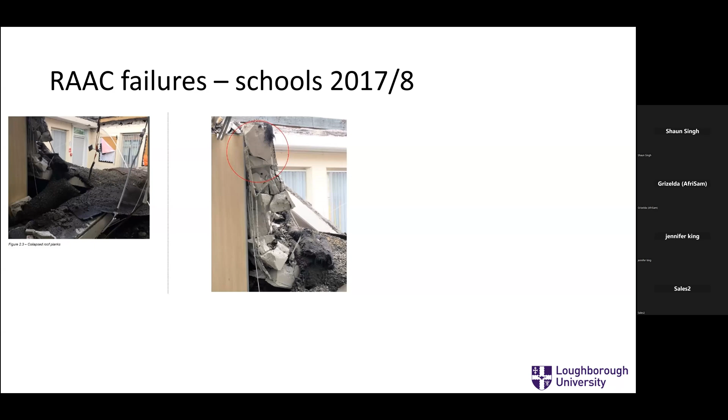So a quick timeline regarding why we're worried about it and why it's in the news. This is a school from 2017-18, so actually 5-6 years ago. The whole roof collapsed - thankfully at the weekend it was empty, no one was even there, no one hurt. There was a slight study, but in hindsight, not a good enough study. Potentially shear cracks, you'll see the red circle there, potentially a shear crack at the support, but a thorough study wasn't really done.

A year later, one plank fell down in the classroom. Again, empty, no one was hurt. One end came off the support, and this is the main failure mode we're worried about. To date, now we've gone looking, there's around 7 to 10 instances like this where usually one plank has fallen off somewhere in a variety of types of building. No one's been hurt yet at all, pretty much in empty buildings, and most of it's been caught by some other part of the element.

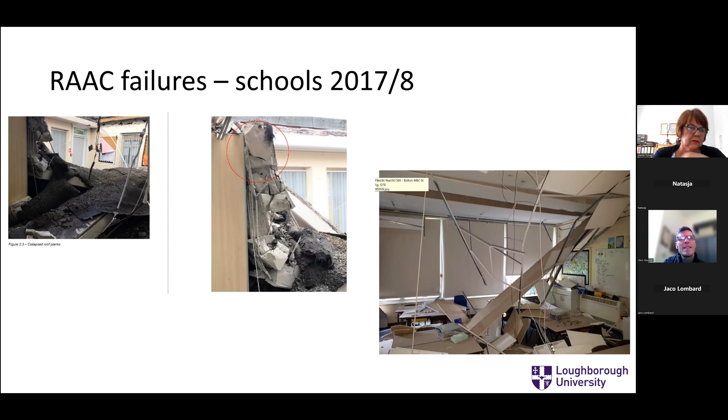We know now that these elements can fail and can fail without warning, although a very, very small proportion of them. But this is the concern, that they can fail with no warning, potentially fatally.

So moving on to hospitals, we've been studying hospitals. These are photos from a real hospital this year. It was on LinkedIn, which is where I got the photos from. A surveyor went in, concerned. You'll see their plank - it's not a collapse, but it's failed. Failed by serviceability deflection, but probably by overloading. It's quite a typical failure mechanism.

It's probably been overloaded from the roof. Someone's probably put something on the roof that shouldn't be there, overloaded it a lot. It's deflected, it's cracked, it's spalling. And to be honest, it's almost been held together by the suspended ceiling and all the wiring and various other things hanging from it, which we do find is sometimes the case.

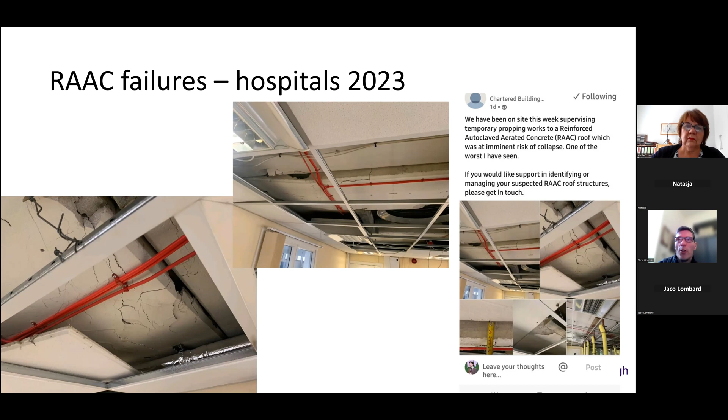So this is a failure, but it's bad practice. It was overloaded, and if it'd been made of timber, it probably would have failed. If it'd been made with another type of concrete, it would have probably failed. But it's RAAC, and it's in the news, so it's of interest. So that's a quick introduction why it's in the news.

I think I need to explain what RAAC is, because you probably, like me, have been brought up on concrete, traditional reinforced concrete, which is everywhere, as we know. That's what we teach at universities, that's what we build with, and that's what we understand. Concrete of about 30 megapascal, 40 megapascal. It's got a density of 2,400. It's got reinforcement in it. Every country in the world builds with it - second most used resource in the world after water is what I tell my students.

But RAAC is different - though the name's actually pretty good. So what is it? It's reinforced - you see some photos there. It's got steel reinforcement, 500 Newton tensile steel. It's welded into a cage. It's got longitudinal tensile bars. It's got anchorage transfer bars that I'll come back to at the end that give it anchorage at the end, but it's steel and it's reinforcement.

The unique bits are the autoclave - that's a picture of an autoclave. It's a big pressure cooker to you and me. You might have one of these, a little one in the kitchen. So it cooks the concrete at temperature, about 200 degrees and under pressure, basically increasing productivity. It makes it cure faster, gain strength faster, and hence you can produce more in your factory. Not rocket science, and it's been around 70, 80 years.

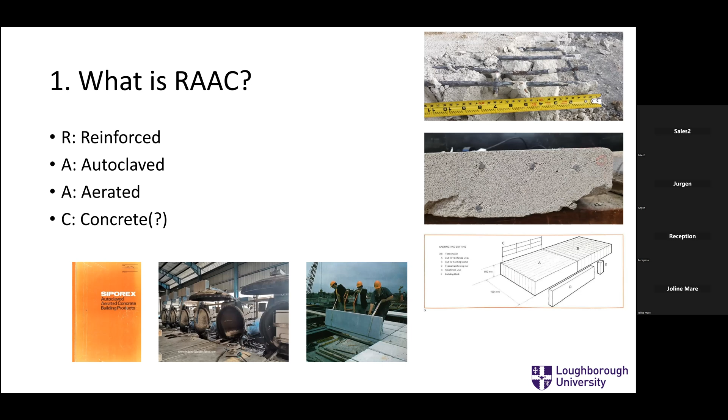The unique bit is how it's cooked or made in the mold, because of the aerated, very low density. So if you're a builder, fantastic - this is half the density of water, a quarter of the density of concrete. You can pick up big pieces on your own. To build with is great - it's fast to construct. You need smaller foundations, a lighter supporting structure, say a steel frame can be a bit smaller.

MMC - I don't know if you use the terminology where you are, modern methods of construction, something we're obsessed with here in construction and in government, trying to force the industry to be more modern, to use more precast, prefab, modern methods, offsite, modular, whatever the terminology.

We're trying to get the industry to be more productive and efficient. 100 years ago, this was the MMC of the day. Fantastic, and it's still used in many countries today. Because of the aerated nature, it's very thermally efficient, and economical because there's not much cement or material in there. It's light, easy to transport, low carbon footprint. There's a long list of advantages of why this is actually a very clever material when you do it right.

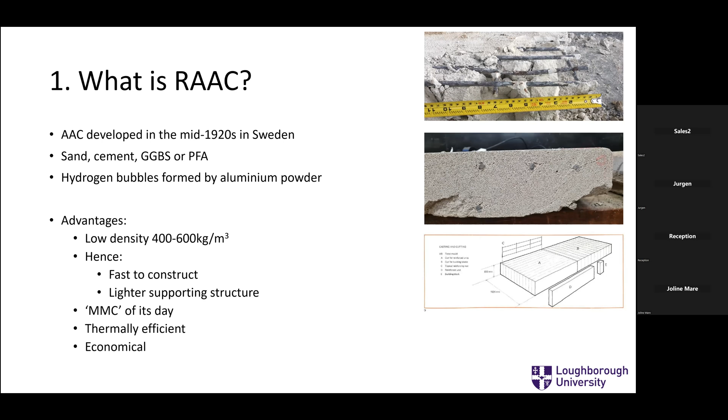This material has some similar problems because of its unique makeup. They manifest and play out in a slightly different way, which I'll come to. So I'm not here to bash RAAC. I've researched it and know it very well now. It's a different material and it's very clever, but it's also susceptible to abuse.

Because it's lightweight, you can cut it with a handsaw. And certainly if you have a circular saw, you can cut through the rebar, because the rebar is typically 6 millimeters, 8 millimeters, maybe 12 millimeters at most. Circular saws, which you get on every building site, will cut through it really quickly. So it does get abused a bit on site, which I'll come back to, and that's been one of the problems.

So I mentioned the reinforcement - it's welded, it's smooth, and it's got a coating on. Some of you might be thinking, 'oh, aerated, that's not going to keep the water out, that's not good for durability.' And you're totally right - the AAC bit is rubbish at durability. Water can go in, chlorides, carbonation - it carbonates really quickly. So for protecting the steel, it's terrible.

Well, we know this, and so we put a coating on the steel. When it's made, the steel is dropped into a liquid slurry coating. There's a variety of coatings - could be cementitious, a higher strength, more concentrated cementitious sand cement slurry. Some of them are polymer modified. Nowadays they're powder coating, so electrostatic coating applied to the reinforcement.

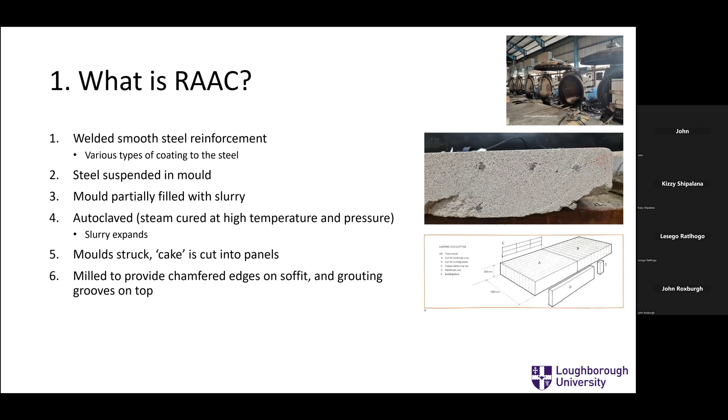They're put in the mold, you pour this slurry in, you put it in the oven, and you autoclave it at high temperature and pressure, and the slurry expands due to the aerated nature. We don't make them as individual elements - they typically come about 600 millimeters wide and about 200 millimeters thick as a typical cross section. So we don't make them in molds like that.

We make them in very big slabs, like the photo there, called a cake - they call it baking a cake, which is really efficient for productivity. And then they cut it up. They literally use a big cutter, often a wire cutter, like a cheese wire cutter but on a big scale, and they slice up the big section into smaller panels. Then they might mill the edges, cut it to shape slightly, put some chamfers on, and shape it slightly.

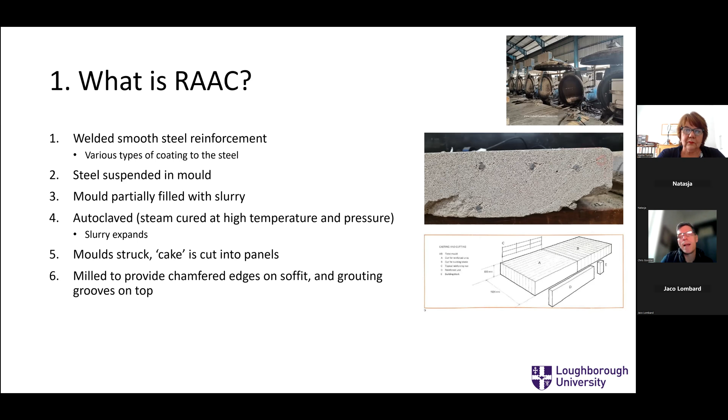So just to share some photos - this is a manual from 1977, so it's been around a lot. You'll see several planks there. As I mentioned, 600 mil is the typical width. They come in various lengths and depths - there's a certain length to depth ratio to get your bending moment and structural capacity, but 600 is often the typical width.

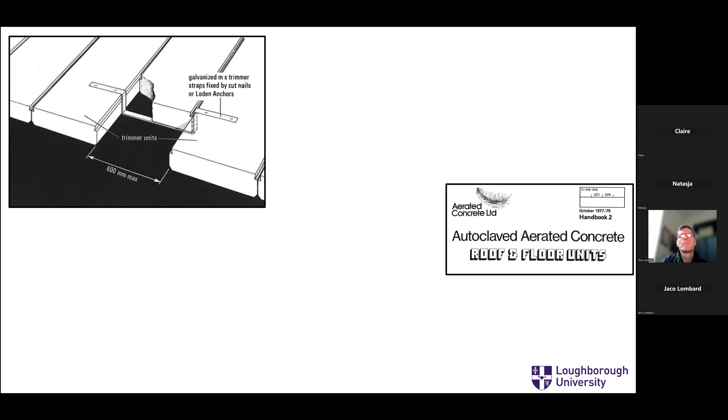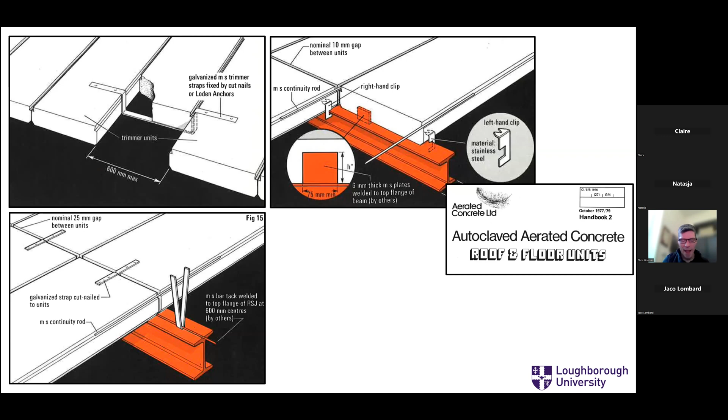So they can be on steel I-beams, or can be on bricks. If you're on a brick, here's my brick, and a brick's that width. Here's one I made earlier. So that's a brick, and we have a plank, and we'll have two of them sat like that. If you build it perfectly, you're sat on about 50 millimeters of bearing for these planks.

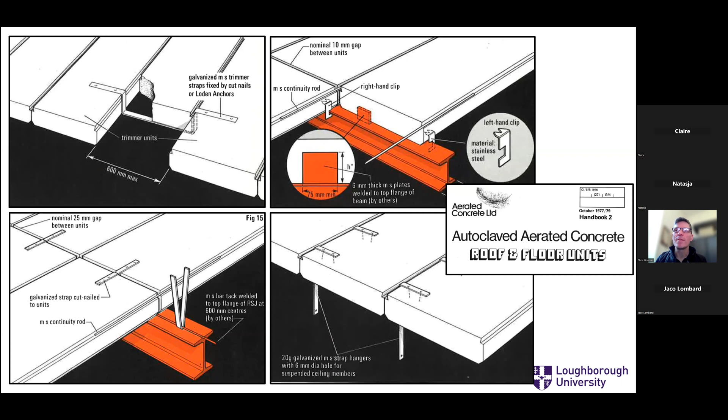I'll come back to whether we built everything perfectly in a minute. So that's how it's made, what it looks like, and how it's built a bit.

Some of them have 10,000 planks in the roof. Imagine the whole flat roof of a major hospital in a city is RAAC - 10,000 planks, and the walls too. So they have a lot of it, and a lot of it is not doing very well. Then you get an assortment of other types of buildings, shapes and sizes.

You'll see there, 7 days ago, it's in the news on a daily basis. Somewhere finds it somewhere, and they find some. I mentioned they're still manufactured in many countries, expanding greatly in many, like India and China, very popular. You'll see Xella is one of the leading companies.

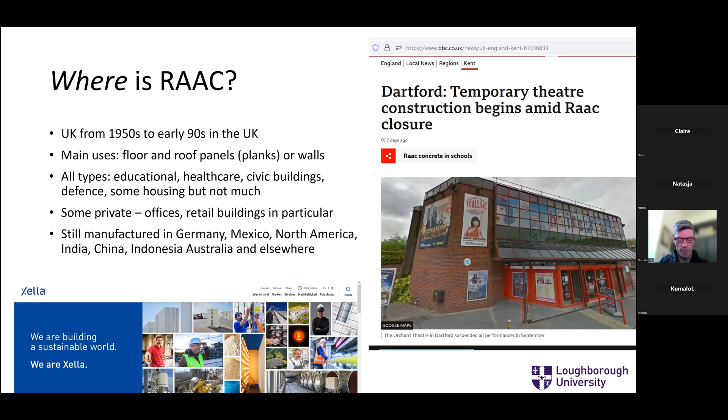There's nothing wrong with the approach, I want to mention that again. If you do it well, like any construction, it can be very good. If you don't do it well, there's problems, and that's what I'll be talking about now really. So, what's the problem? If it is a good system, what's the problem?

I mentioned it was very popular here. There were some studies in the 90s at BRE, which is where I used to work, but I didn't do this myself. They tested some panels and they were deflecting a lot. They creep more than normal concrete if you overload them, because of the compressive strength, so they were deflecting more than normal concrete in some instances. The advice was, there's nothing wrong with it really, but it does deflect more, so be very careful using it because it does have some problems. The industry moved away from it and stopped using it in the UK from the 90s.

I showed the photos of the school collapse - that raised it up. We have something called SCOSS here, the Standing Committee on Structural Safety. This is where you report building failures for the good of the industry. There's a report from 2019 saying you should go and find out where your RAAC is and check it's okay, because it fell down in a school. So go and find it and have a look.

The hospitals were already on this. The NHS, National Health Service, looks after all our health service and hospitals, and they have a lot of RAAC. Hospitals are 24/7 buildings, occupied 24 hours a day, 7 days a week, with important people - patients and staff - and therefore need to be open, maintained, and operational. Their estates and facility management teams know their buildings inside out, and their job is to keep it running. They know every brick, every plank, every piece of wood, and they survey, monitor, and maintain it. They do a great job.

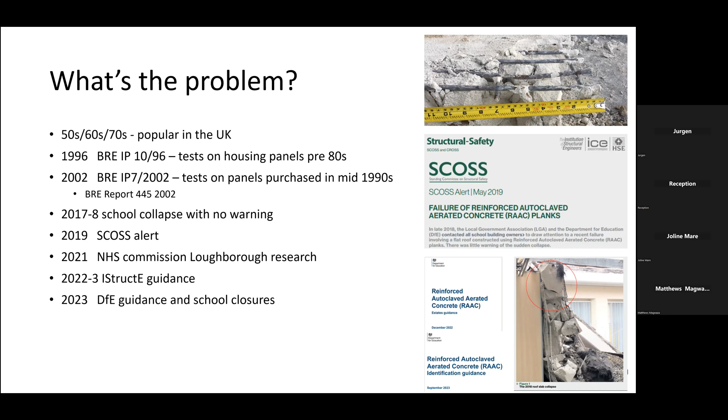There's some guidance from the Institution of Structural Engineers, which we contributed to, and I'll mention that in a minute. Then this year the DFE, our Department for Education, produced some guidance on school closures, with immense interest from the whole industry and from government. But really, it was probably the SCOSS alert that raised it in people's consciousness as something that needs special treatment.

So moving on to the research we're doing or have done on RAAC. There are some collaborators on the side there, funded by the NHS - credit to them for putting their hand in the pocket, which in hindsight proved to be a fantastic thing to do. They saved the country millions. We had partners like SWECO, CPT - corrosion preservation technologies, leaders in corrosion of structures - and some testing partners there, Lucidium.

So we did a variety of things: ground penetrating radar surveying where the rebar is, corrosion monitoring, testing. We did SEM analysis, XRD, material characterization, structural testing of old planks, some modeling, finite element modeling, monitoring, data risk analysis, and some artificial intelligence on the surveying and data analysis. But really, the ultimate aim was to understand how RAAC is different and how it behaves differently.

Because we can see it behaving differently - we can see it creeping, deflecting, we've seen it fail, but we don't know why. So, in partnership with the National Health Service, the aim is to better understand how we can look after the RAAC we've got.

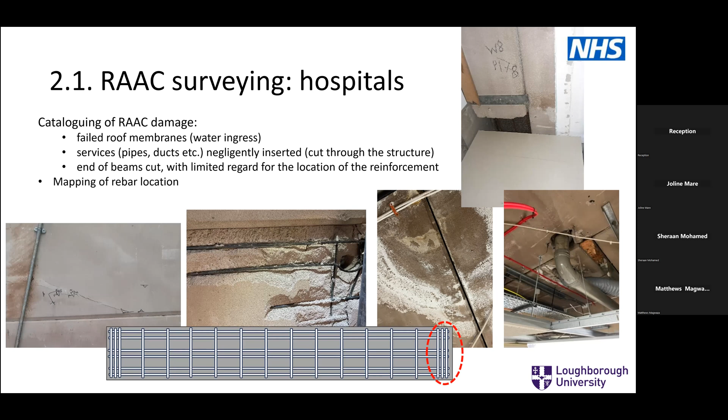Then we did some structural testing, partly in the lab. We took about 20 planks out of hospitals and tested them full size in the lab: compressive shear testing, pull-out testing, bending.

We also did some testing on site. So you'll see a live test on site there. That is bags of sand, 25 kilograms each, stacked up on one plank until it failed.

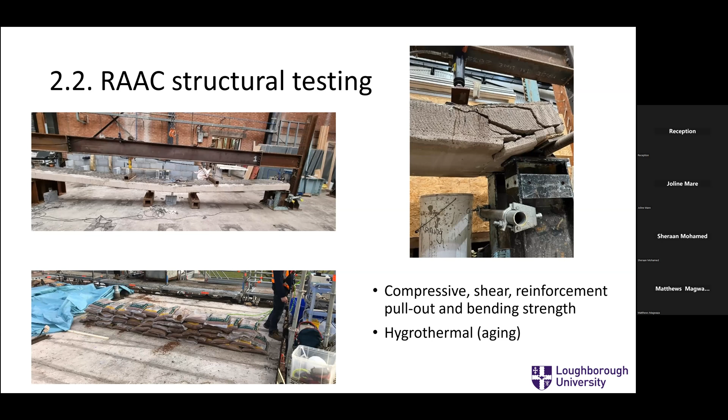Do you see the video there? That's me in my boots. That's one plank, 600 mil wide. Take off the waterproofing, and if you jump up and down on it, it flexes quite a lot. This material does creep, it flexes. It's fairly similar to timber as a material in many ways, rather than concrete.

We had quite low hopes of it taking much load, partly because of the collapses we'd seen. But when we loaded it, you'll see 92 bags of sand - the engineers among you will know that's a very decent UDL load, a very decent load per meter squared, 2 or 3 times the design load. So it took 2 or 3 times the load it was designed to. If you do it properly, this material is strong and takes a great load.

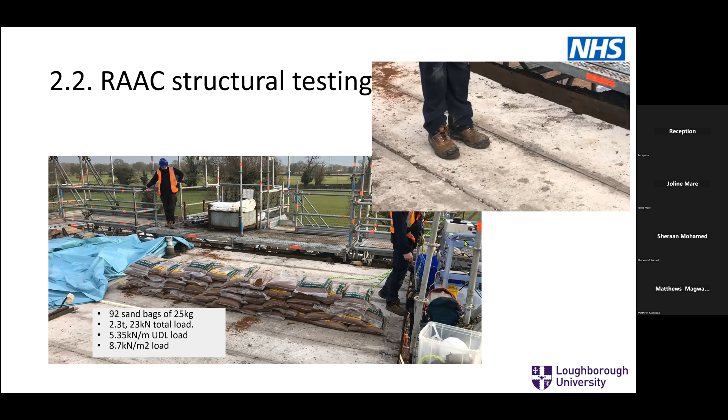So this was interesting - what's going wrong? Why have some collapsed, because the ones we're testing are actually doing very, very well?

The compressive strength I mentioned was very low, but we know that, and it was designed to be low, so that's okay - it actually has little influence on the structural capacity. If you change the compressive strength from 2 to 4 megapascal, the structural capacity, as in bending moments, doesn't change a great deal. It's the steel reinforcement that is the capacity and does the heavy loading.

One of our conclusions: we tested 40-year-old planks. We took them out of buildings, transported them on the motorway, craned them into the lab. They cracked a lot, they do crack quite easily. And we tested them, and even then they took a good bending moment above what they're meant to from the design codes. So again, the planks themselves aren't too bad.

Even after aggressive hygrothermal testing - we put them in chambers, applied several days of rainfall, intense rainfall, accelerated weathering, temperature cycles of plus 40, minus 40 - their performance reduced slightly, as any material would in that aggressive environment. But still, bar one plank, they in general took enough load, even after that very aggressive hygrothermal testing. I think we were probably surprised at this.

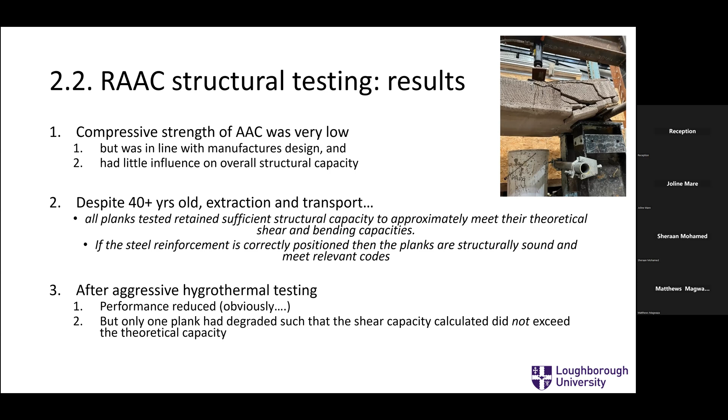But what they've done is sawn through the steel - sawn through the end of the longitudinal steel. So you've got no cover. In worst cases, water can get to it and it can corrode.

But the big problem, and this is where the main risk is, in some instances they've not just reduced the length of the longitudinal steel - the anchorage transverse steel at the end that anchors those bars and stops them slipping all the way through, they've sawn off. So imagine the anchorage of those longitudinal bars, which take the bending moment - because the AAC is so weak, there's very little anchorage, very little at all. They need these welded transverse bars at the end to anchor them, otherwise they slip through. And if you saw them off, those bars can slip through when you increase the load. So this is the key concern.

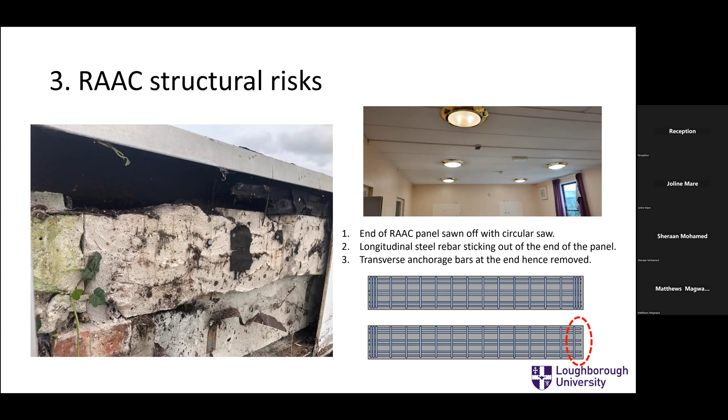This is where builders have cut the reinforcement off, which in any type of concrete is obviously a bad thing to do, but in particular for RAAC is very bad. So there's a photo of the inside of a RAAC panel. You've got the longitudinal reinforcement and transverse reinforcement, and it's the last bar that's important.

You need that anchorage bar at the end to anchor at the end, and it's this zone near the support that we're worried about. So the guidance says that last transverse bar, anchorage bar, needs to be over the bearing. Because if it's not, then you've got no reinforcement at the edge of that bearing, and a shear crack can develop from the edge of that bearing into the plank.

And that's a shear crack with no warning. There's no deflection warning, there's no initial cracking. It just cracks a shear crack, and it can collapse. And that's what's looked like has happened in some of the failures. So the really tricky thing is that you can have a room like this that looks perfect on the inside, but really there's critical reinforcement missing on the inside that you can't see. So this is the worry.

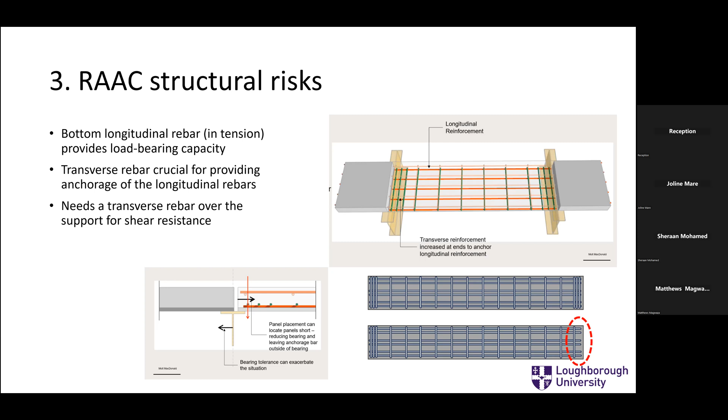That's the main worry. There's also a list of other defects in the guidance that can exacerbate this or accelerate it. So the main issue is the steel missing, which can lead to a shear failure with no warning. Some of these other defects can lead to that.

Voidage around the reinforcement, deflections—if you've got your plank sat on your bearing and it's not very big, that's a problem. But then if you're deflecting, suddenly you've just developed a nice stress concentration at the point just where the crack wants to develop and propagate. So deflection isn't going to cause failure on its own, but deflection can exacerbate the problem, and there's other defects that can exacerbate the problem too.

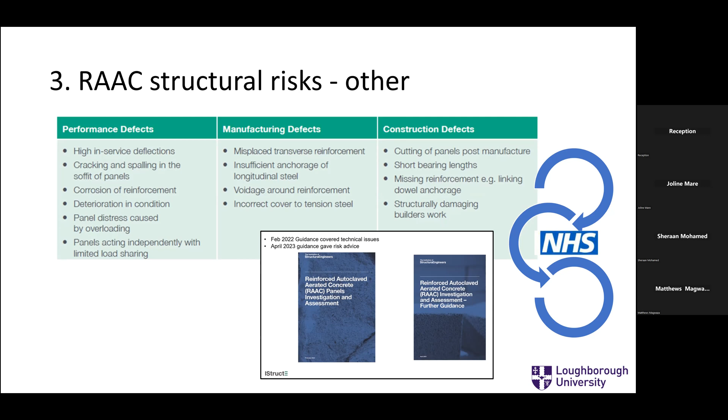So we developed some models, and we had to develop our own, literally rewrite the code, because this type of material doesn't exist in traditional finite element modeling programs—the compressive strength doesn't go low enough in the programs, and the granularity, the kind of quality or the finesse of the modeling wasn't fine enough to model exactly the bit that we want to model. So we developed some models that fit very well with practice.

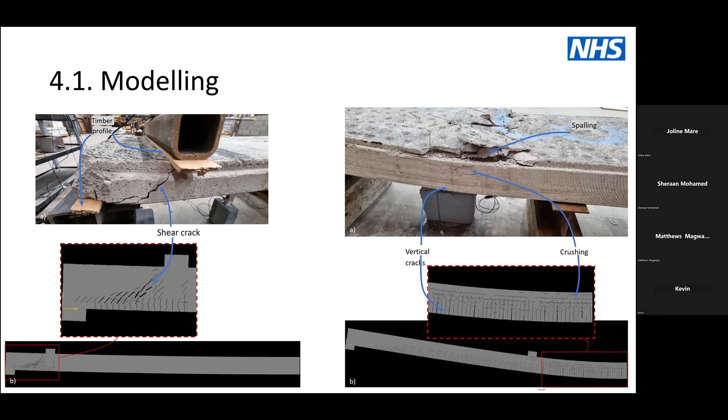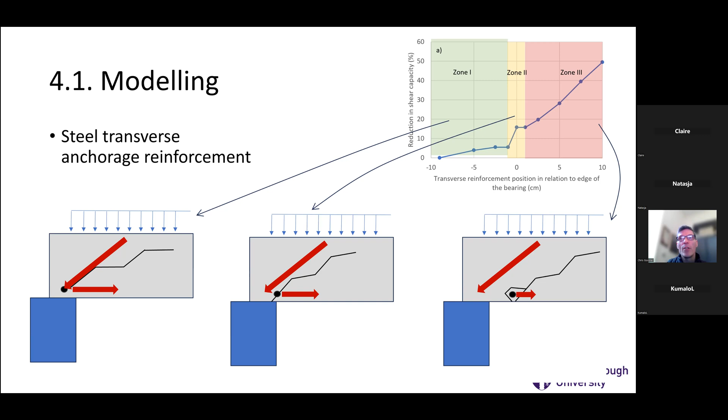But quite quickly, if you move away from the bearing, so that steel bar isn't over the bearing, then you start eating into your safety factor and your capacity too much. And then it depends on all the other factors, as in the loading being the main one, the size of the bearing, the condition, the quality of the RAAC, the compressive strength. If everything is perfect, maybe you've got a bit of leeway there. If you've got other defects in your structure, which many 50-year-old buildings have defects, then it could fail with that bar not very far from the bearing. So this is the key concern worrying the structural engineers, which very much informed the guidance and hence the closure of the schools.

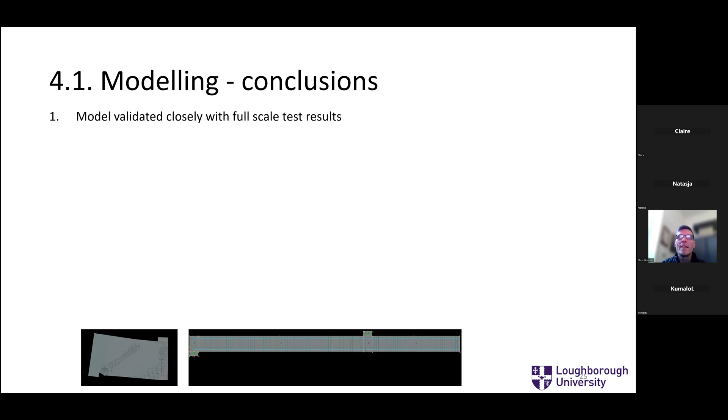So we concluded the modelling was a good model. It validated with the full-scale results. You got a reduction in the shear capacity as the bar moves away. So that's the critical thing to find, and also that's the thing that's very hard to find—you can't just do it from visual inspection. And therefore, this rebar should be over the bearing to ensure your load capacity.

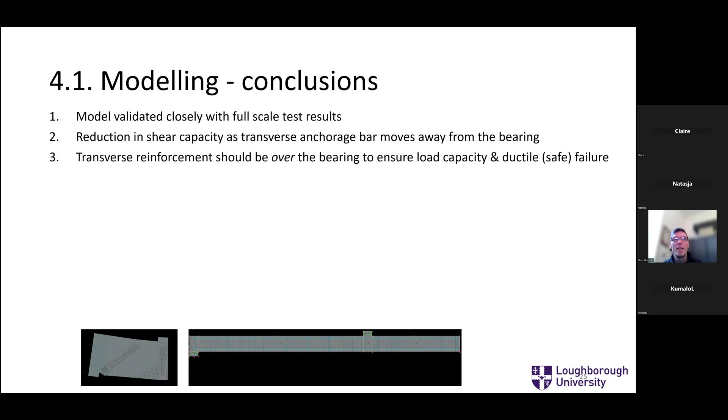And if it is—if that transverse reinforcement is over the bearing and you put a high load on it, you'll get a ductile failure, which is a safe failure. The more that bar moves away, the more likely to get a brittle shear failure without any warning. So, as any beam, if you load it enough, it is going to fail.

So, coming back to my caveat in defence of RAAC: if the reinforcement's in the right place, then it will take a good load. But from the collapses we saw and site investigations, some of these bars are missing, mainly because they've been sawn off during construction, and occasionally they just maybe weren't there due to manufacturing defects or modifications over its service life.

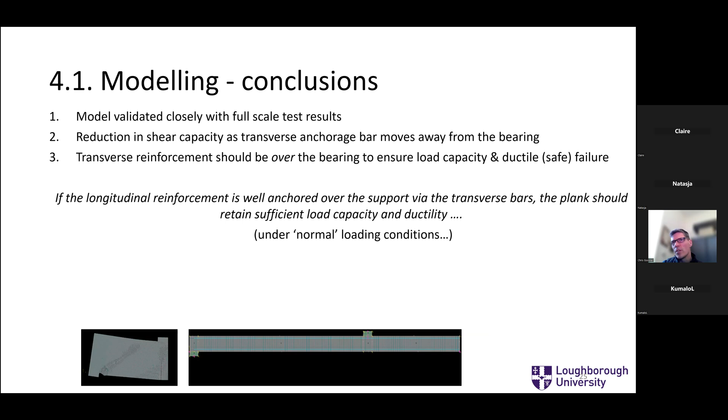And mention about further research. So we get asked the question, well, okay, they've been there 50 years. So why are these planks failing now and not 10 years ago, 20 years ago, 30 years ago? We don't know exactly, which is why we need to do some more research.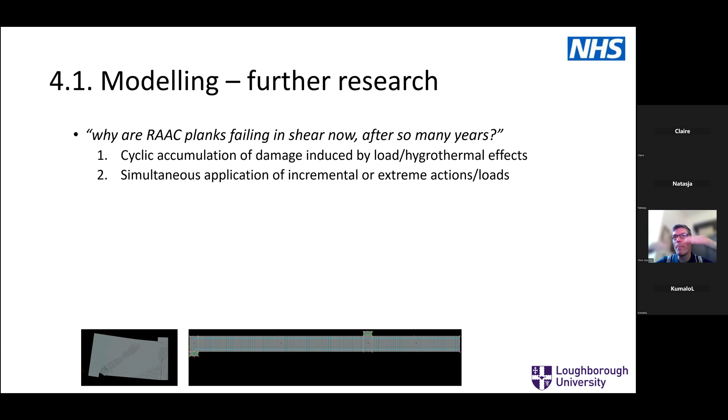But our hypotheses are that cyclic damage, climate change for me, increasingly aggressive climate change, temperature changes, weather-induced rainfall is aggravating those planks more than ever before. Extreme actions, loads, just re-waterproofing your roof. You think you're doing a good thing, re-waterproofing it, but walking on it, several heavy men walking on one of these planks makes it deflect, creep, bounce, the grout comes away, and you've done it some damage. And also corrosion of the reinforcement, very much an unknown, because it's got this coating on, it corrodes in a very different way to a traditional reinforced concrete.

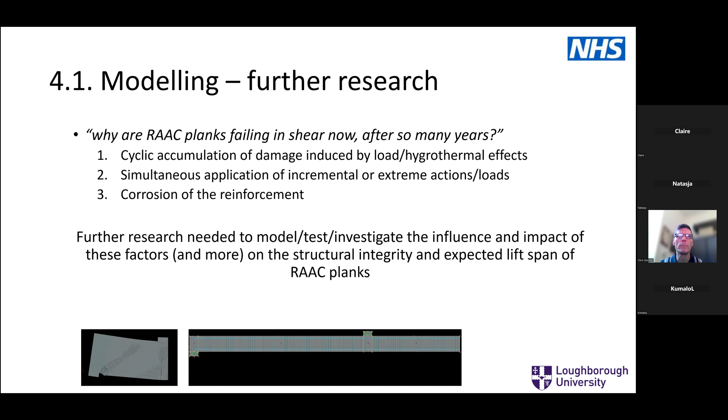So I'm just conscious of time. I'm going to skip through this part because it's less concrete technology, and also I didn't do it. And I'll finish up with a couple of summary slides about remediation repair. So what? What can we do about it?

Deflection is the obvious thing we see. We can see it deflecting, and this stuff does creep and deflect. But it's more of a serviceability problem rather than a structural problem. It's okay if it deflects a bit. It might exacerbate this problem we have at the bearing, but it'll never fail from bending too much. So we can correct the deflection fairly easy. We can prop it up, but sometimes that makes it worse because you've aggravated the plank.

Spalling is a problem. Sometimes bits of concrete fall off, and in a hospital or school, this is the problem. Again, less of a structural problem. It's not going to fail because a bit of concrete's fallen off. More occupant risk. Patch repair is very interesting.

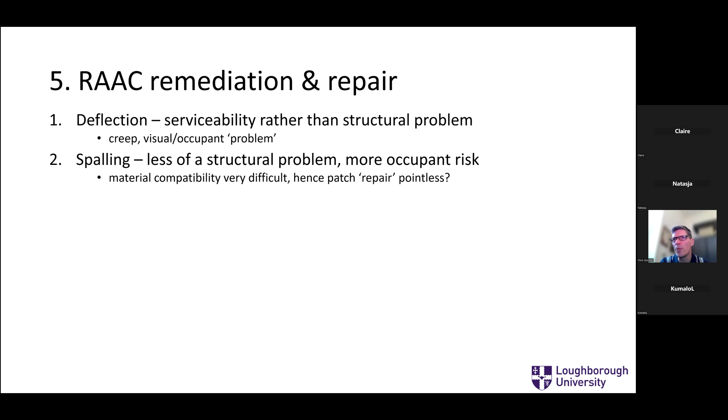I think it's very difficult to do. There's very few patch repair products on the market, and compatibility is very difficult. Very different compressive strength and modulus of elasticity than the normal repair mortars. So your patch won't last long, basically. If you patch this with normal patch repair materials, it won't last long.

Cracking, again, mainly cracking through deflection is what you see, and that's not really an issue. The shear cracking is the issue, and that's on the side of the planks, and you can't see the sides because they're next to each other. And if you're seeing shear cracking, sometimes it's too late because it's starting to fail in shear, and it's a bit too late.

Corrosion, there is some corrosion in the roofs, but not enough yet to warrant structural reduction in capacity. There are some in exposed walls. RAAC is used in some hospitals on the walls, and they're not waterproofed. So these things have soaked up water for decades, and there's some quite serious corrosion on some of the walls. You can address that. Cathodic protection systems, sacrificial anodes, hybrid anodes have successfully shown they can stop that corrosion on the planks. But still, coming back to this, the main structural risk is this lack of a bar missing or two, and it's being cut off at the bearing support.

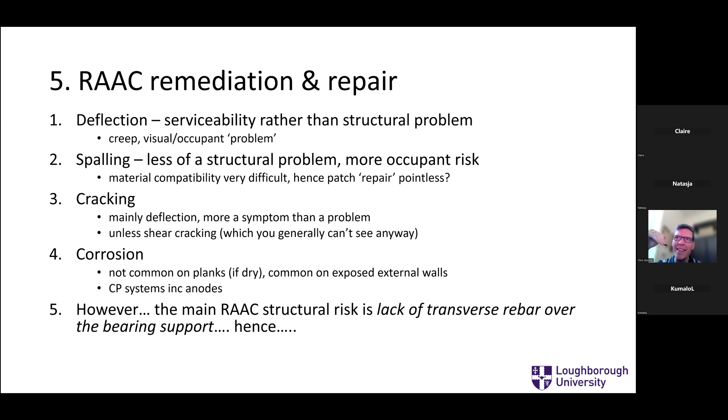That's the main thing. And so to remediate that, you can't put a bar back in. You need to strengthen it. So that's the main risk and main concern.

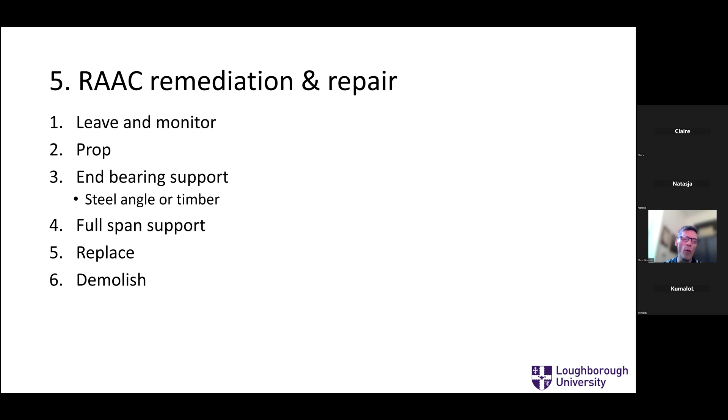So what have we been doing about it? What have all these schools and hospitals been doing to reduce this risk? And it's about reducing the risk. We can't afford to replace all the RAAC. There's too much of it. It's too expensive. So the main one is leave it and keep an eye on it. And many places are doing that. So the whole country's been finding RAAC and then keeping an eye on it.

The quick one is to put some props up, but they get in the way and they look bad and they scare patients and they scare children. So it's a temporary measure, really.

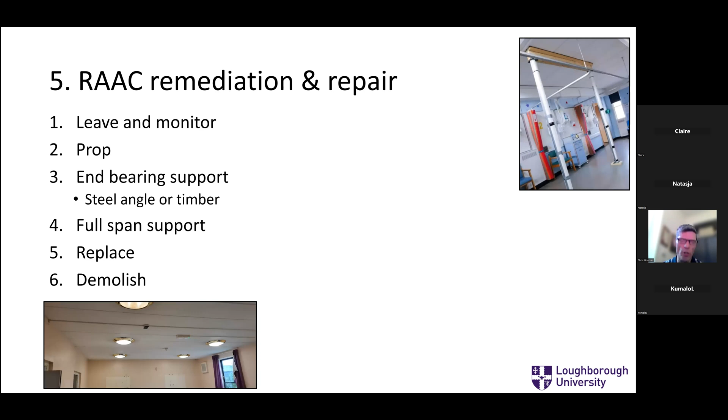So the main ones have really been end bearing supports. This is where the critical risk is failure at the end bearing. So if you can apply some strengthening to the end bearing, or strengthening and structural support to the whole plank, that reduces the risk. So you'll see there some very elaborate structural strengthening systems, timber or steel, that have been installed in many sizes of buildings. So there's a variety of these systems existing now.

Or five and six, replace it if you've got the money, demolish it. So again, it depends how long you want that building to operate, because many of these are 50 years old anyway. So some have just been, let's knock it down early, let's just leave it empty. Or if you want to keep it going, we install some repair and remediation.

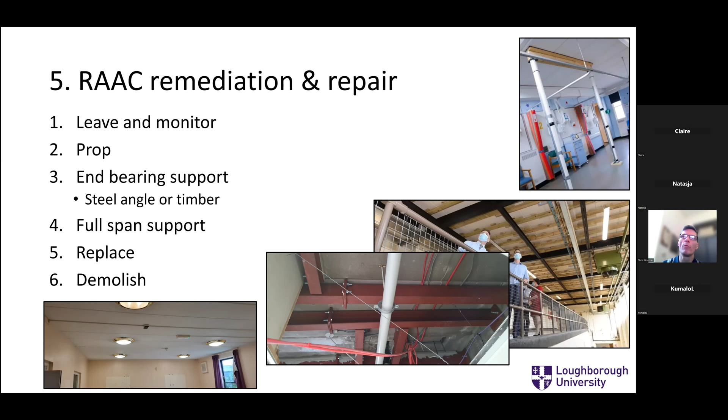So I'll stop there. That's what I've covered in Introduction to RAAC. We've been doing some research on it. I missed out the modeling and monitoring for time, and then for more information. But happy to answer any questions. Please don't hold back on your questions.

Thank you, Chris. That was most interesting. And in very layman's terms, as usual, this seems to be a construction problem rather than a material problem. But the material suppliers are always the first ones to be blamed when anything goes wrong. So that's what we find in South Africa. I don't know if anybody in our audience can give us a feel for the application of RAAC in South Africa. Dr. John Roberts, do you have a handle on that sort of a number?